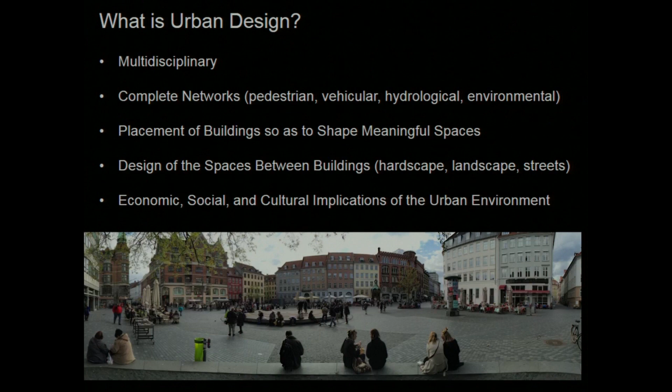Now, what's urban design? Urban design is a multidisciplinary field. It involves quite a few things, including transportation, land use, buildings, open spaces, landscape, hydrological and environmental factors, and first and foremost, the placement of buildings in a very intentional manner. There are also economic, social, and cultural implications that go along with that as well.

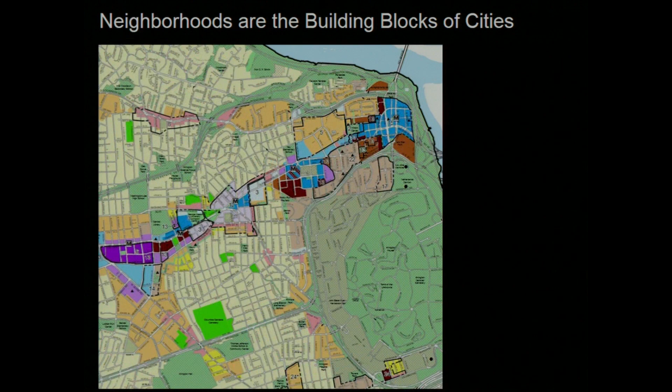All great cities are made up of neighborhoods. Paris famously has its neighborhoods, and Arlington also has its neighborhoods, which are reflected in our land use policies and general land use plan. There are certain fundamental things that neighborhoods have: an identifiable center and edge, often with the edge being some kind of larger arterial or natural feature. They have a range of housing types, places to eat and work, and open spaces and places to recreate. Ideally, every neighborhood has a little bit of everything—sometimes more residential, sometimes more commercial—but generally a neighborhood has a range of things in it.

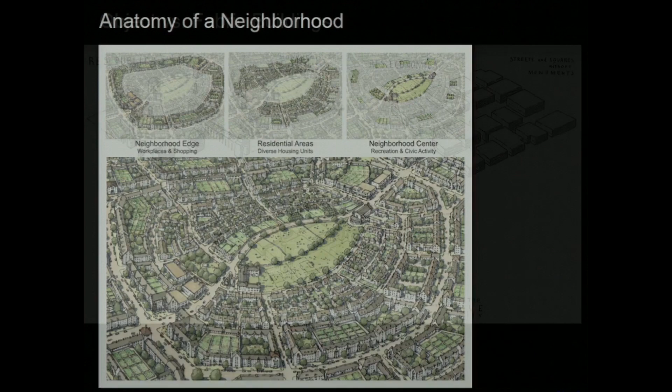Cities are also made up of the building blocks of buildings, but they're not necessarily all on equal footing. You can have a building that's all civic buildings, but you need the combination of civic buildings and public or private buildings together that, in concert, make up a city.

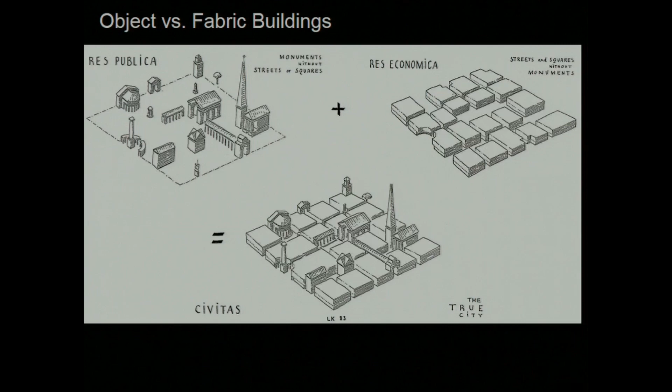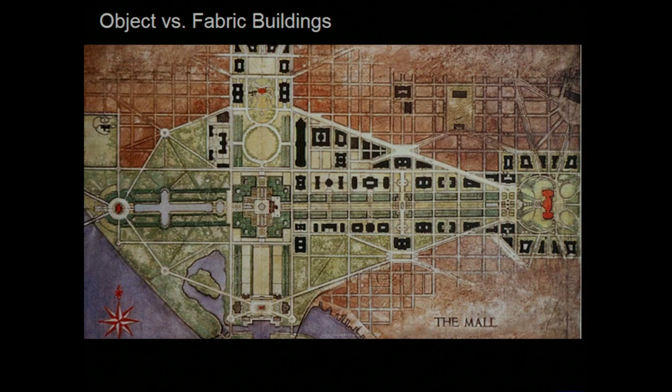Washington, D.C. is a really good example of that. From the McMillan Plan, you can see the buildings shaded in black are the civic buildings—those are the important buildings. The buildings in the blocks shaded more in pink are the private development, where people are living and working. Together they make up a city.

The same is true from the 1909 Burnham Plan for Chicago, which very clearly outlines that. You can see the blocks of private development, and then there's special attention and special placement of buildings that have civic and cultural importance.

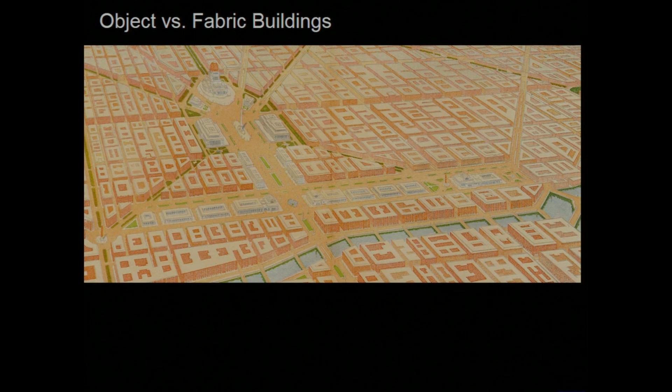So, I talked a little bit about the enclosure and the intentional making of space, and I think this is really the most fundamental aspect of urban design. The buildings are important, but the most important thing really is the space between the buildings—making a place that's comfortable and very clearly defined.

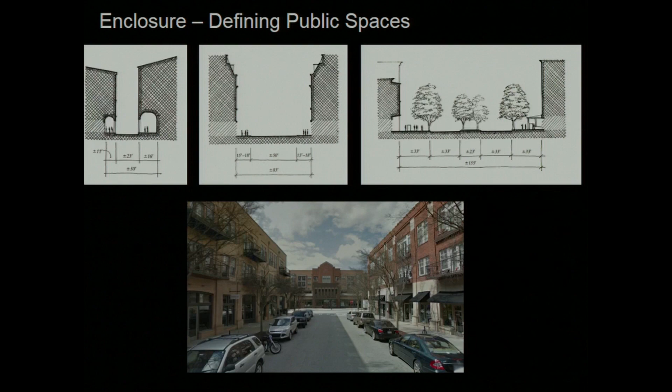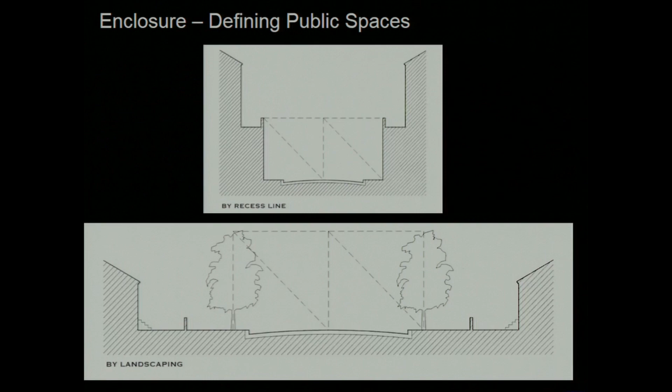These can range from the upper left-hand corner, a very narrow street from Europe, to the upper right, more of a typical American main street. But the thing that those very successful places all have in common is they generally have pretty tight proportions that the buildings, and sometimes the trees, create to make that space. A proportion of 1 to 2 or 1 to 1 is often very good. If you get any farther apart than that, you start to lose that sense of enclosure and that sense of space.

The design of the buildings themselves, while there are important factors that help reinforce those successful spaces—pedestrians are very comfortable in these more enclosed spaces—the design of the buildings themselves doesn't matter as much. You can have something more traditional or more modern, but as long as you've got that enclosure and the buildings are doing the right things, you're going to have a pretty successful environment where people want to be.

But it can also happen in a more subtle way. A street just curves ever so slightly, or there's a hill or some kind of natural feature that helps to create that sense of enclosure.

There's certain things for commercial buildings that are very important. You need to have transparency. As people are walking by on the sidewalk, they need to be able to see what's going on inside the buildings, a sense of activity. But also you need some kind of delineation between the pedestrian realm and the upper portions of the building. There's a lot of other things that go along with that, signs and canopies and street furniture, that all help to contribute to that.

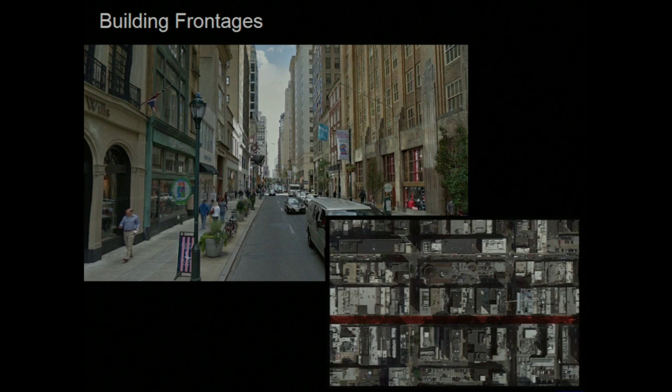One of the most fundamental, important things to having successful frontages for buildings is that they need to be continuous. So the photograph in the upper left-hand corner is from Walnut Street in Philadelphia. You can see a pretty successful retail street. There's a large assortment of buildings, all different designs. But the thing that makes that all possible, you can see on the bottom right-hand corner, there's a little aerial image. The red outline delineates where Walnut Street is.

The thing that helps support that is the network of alleys that actually run behind the streets that help to service those retail areas. So if you imagine the same street interrupted by frequent loading docks and parking entrances and things like that, you start to lose that synergy and that collective energy of all those shop fronts close together.

So the design of these spaces isn't something that happens overnight, and it doesn't happen by accident either. This is an image from Savannah from the early 1700s. If you've ever been to Savannah, one of the most famous things about it is the squares that it has.

They have a variety of characters to them. But you can see, I believe this is 1734, right as they're ripping the new settlement from the wilderness, that even though at the time it's basically a single family home subdivision, the homes are actually arranged in a way that's very urban. And you can see the squares are actually already there, already laid out and ready to be filled in and completed.

Rittenhouse Square from Philadelphia, the same idea, a very old plan. It's been filled in over the years. You can see the buildings around it are from different time periods, they have different styles. But one thing that is very apparent is when buildings aren't playing along with the others.

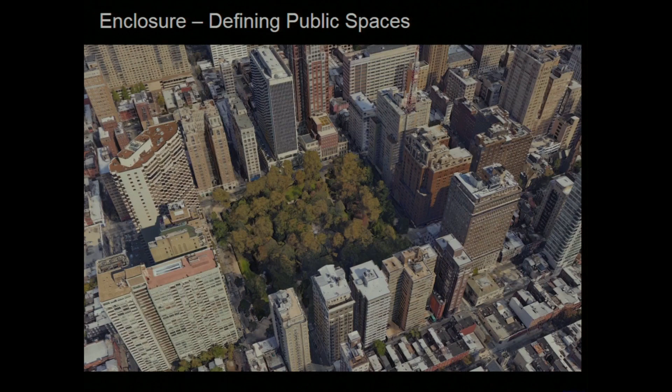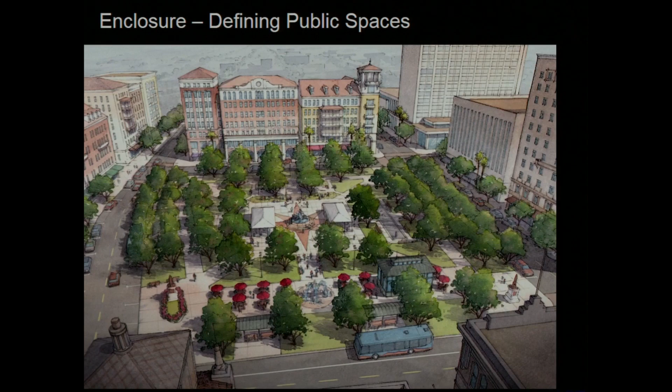All these are helping to reinforce that space. And this one, the architect just wanted to do his or her own thing. So again, the idea is that the buildings really all need to be working in concert to help shape those spaces. And in addition to those buildings shaping the spaces, it's also important to think about the design of the open spaces that those buildings are framing. And Brett is going to talk a little bit about that.

Thank you, Justin. So Justin's done a really great job of setting up the framework you can see here in this map of Paris. We talked about neighborhoods, we talked about blocks, we talked about streets, and we talked about the placement of buildings, creating enclosure, and now we're going to move on to talking about the design of the public spaces, the spaces between the buildings. And you can start to see in this map here, outlined in green, the network of these open spaces and how all this really starts to fit together to create a special place in a great city.

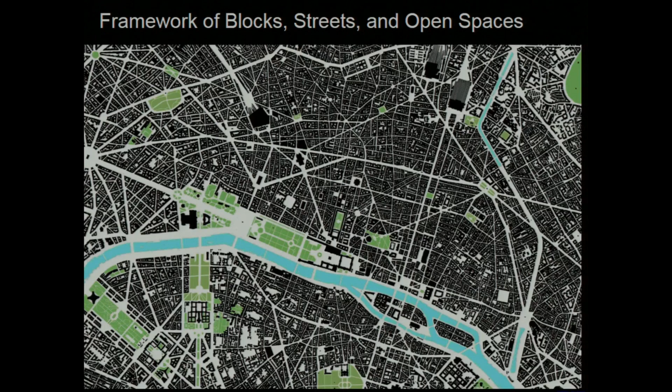Before we start getting into the design of the spaces, we always like to look at comparisons from other areas across the country or the world. This is just an example of some other public spaces with different acreage, and we start to identify what works and what doesn't, what fits in what space. We'll get into that detail in a minute.

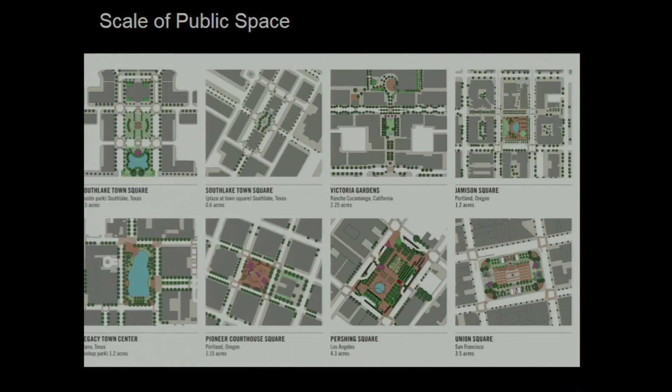Once we start diving down into a public space, we'd like to look at what the anatomy is to create that special place. This is a diagram and picture from Jamison Square Park in Portland, Oregon, and you start to see some of those principles applied here. We've got buildings framing the public space with windows facing onto the space, serving as visual surveillance, eyes on the space. We've got a balance of passive and active uses here.

We've got hardscape on the left with a very active water feature, and a more passive green lawn, flexible lawn space on the right, and there's a hierarchy of paths that move through the space. All this really works together to create a great space. This park, pictured here with the water feature in the middle, is approximately 1 acre in size.

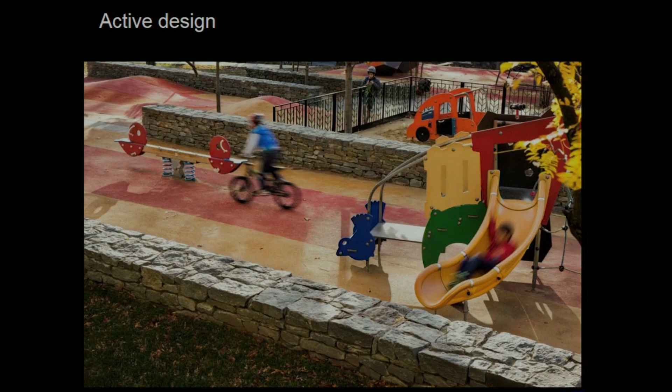Another thing we like to think about as designers when looking at plans is how we incorporate active design and recreation and healthy lifestyles into our public spaces. A lot of this involves heavy programming, but planning out spaces that are flexible and can accommodate these types of events is critical.

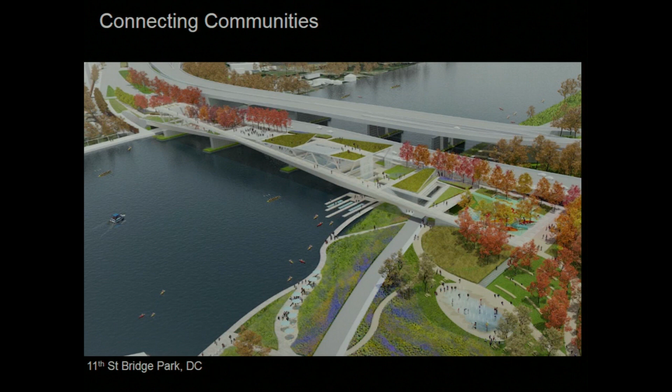And we have, in the future, our very own example here -- this is, or we will have in the future, the 11th Street Bridge Park in Washington, D.C. The Navy Yard is to the north, and this is Anacostia over here. This is an existing bridge today that will be repurposed to create a really great public space, again connecting those two neighborhoods in Washington, D.C. So thinking about repurposing infrastructure is something we need to consider when looking forward in our planning efforts.

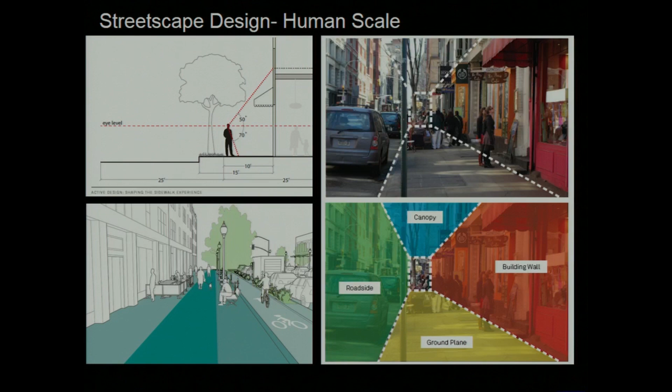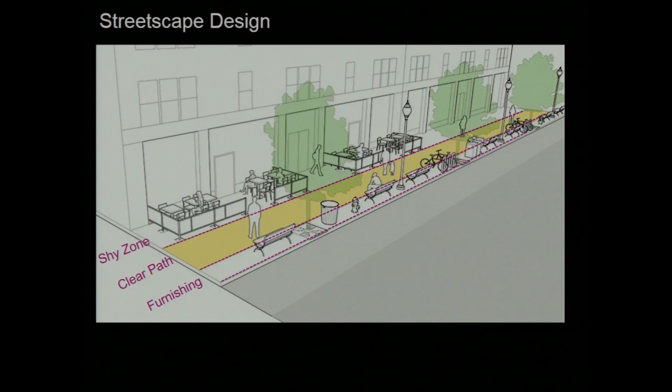And in terms of the streetscape design, we've identified, along with other cities, a building frontage, these zones for travel. There's a shy zone where cafe seating is usually located. There's a spill out zone for people coming out of retail and cafes. Usually there's a clear path outlined here in yellow, and then the furnishing zone along the curbside, where we see street lights, trash can, benches, and other furniture and utilities.

And in terms of streetscape furniture, depending on the district, we like to create a consistent, cohesive family of street furniture, again, so that everything relates to one another. It feels intentional and it's not piecemeal. And so this is just an example from the Rosslyn Business Improvement District streetscape, some of the furnishings they're considering. And there's a lot of design thinking about how all that is laid out on the street.

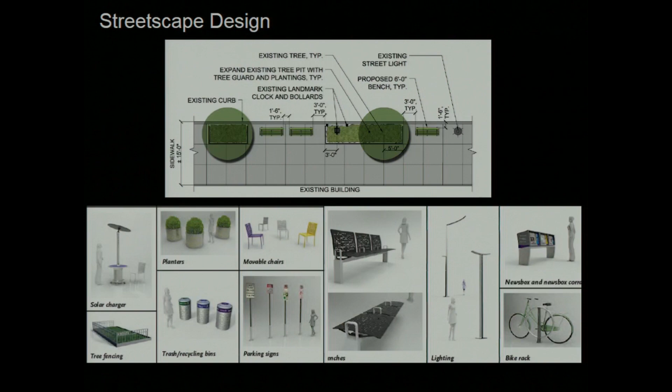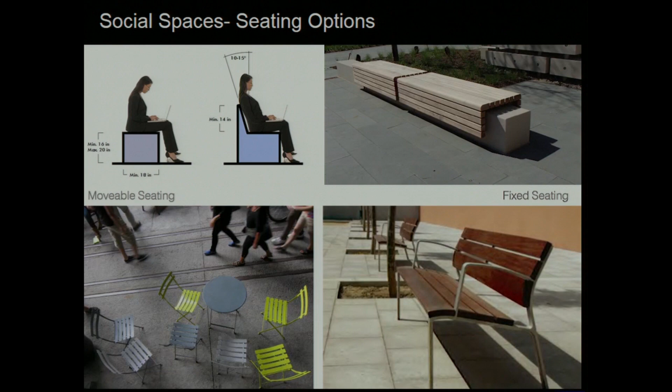And in terms of the furniture, there's a variety of different furniture. I believe the success of a really, truly great public space has a variety of different seating options. So you have fixed seating, you have movable furniture, there's seating without backs, there's seating with backs, and then when you start thinking about seating, we have to think about the ergonomics of seating and user comfort, and thinking about the different angles of the back and what's a comfortable sitting height, which usually ranges between 16 inches and 20 inches. So a lot of things to consider in the furniture layout and design.

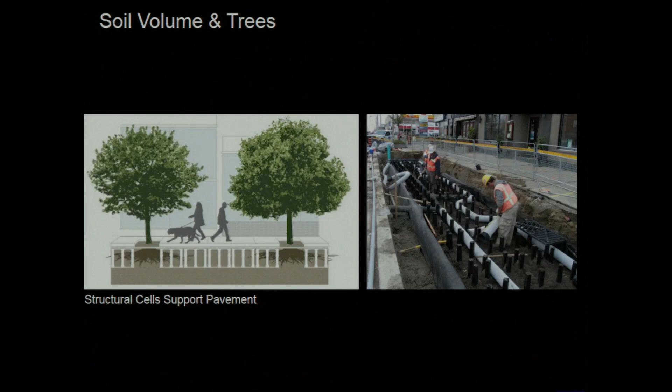These are things happening below the pavement that we look at throughout the design process. This is another example of structural cells that support pavement, and this is an example of this going into the ground. These are plastic crates that support the pavement above, both pedestrian and vehicular loads, but also allow for uncompacted soil below grade so that roots can spread out and eventually create healthy large trees.

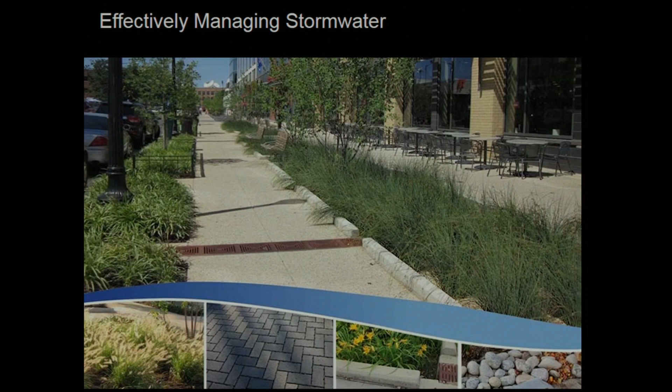Streetscapes are also a way to intercept stormwater. We've got a lot of stormwater regulations, and we're looking at how we can capture and treat stormwater runoff from the street and the sidewalk. This is an example from Washington, D.C. in the NOMA district, looking at native plantings, low-impact development. We've got cafe seating, clear paths identified here, pervious paving, and other materials on the sustainable palette for that project.

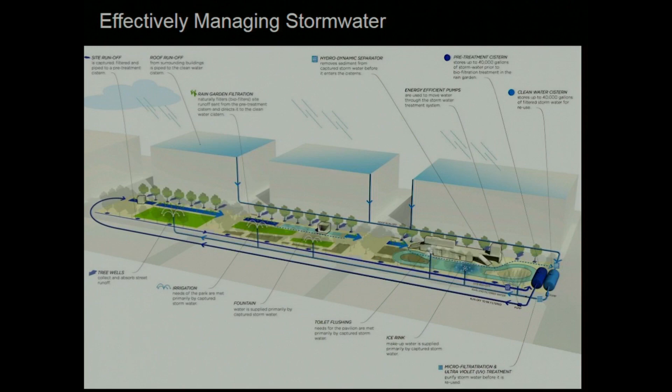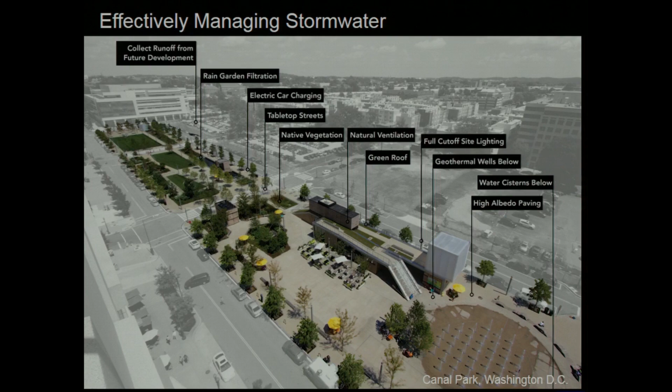During the wintertime, there's an ice skating ribbon here, and during the summertime that's removed and it becomes a water splash pad for children to play in. There's flexible lawn spaces—you can see in this aerial perspective that splash pad converted into an ice skating rink in winter. There's a cafe helping to activate this space on the corner of M Street, and flexible lawn and event space that can be programmed to support some of the events we showed earlier.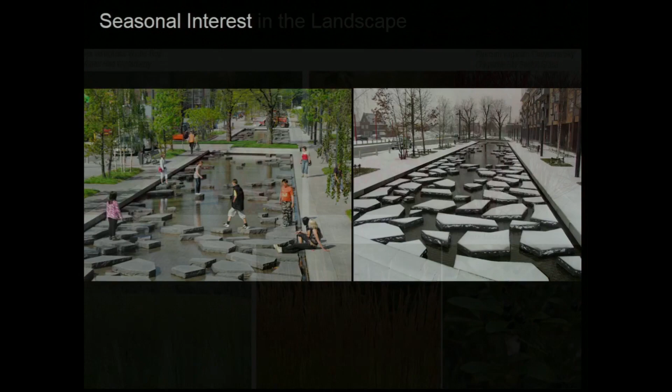Again, thinking about the different seasonal interest in the landscape, we've got a water feature here. How that's used in the summertime versus how it's perceived in the wintertime really creates a dramatic effect with the snow—things we need to consider in terms of seasonal interest in hardscape, but also in the landscape. We like to look at plants and species during our site plan review process, but even post-review we're looking at landscape plans to ensure we're selecting the right plant species that create the most dramatic effect.

This is an example from the Lurie Garden in Chicago near Millennium Park, but this is a really great design—a way that the landscape architect used salvia, which blooms in the early summer. It creates a dramatic effect with a purple wave running through the landscape. And so thinking about different seasons and plant species as we look at these landscape plans is what we do on a daily basis.

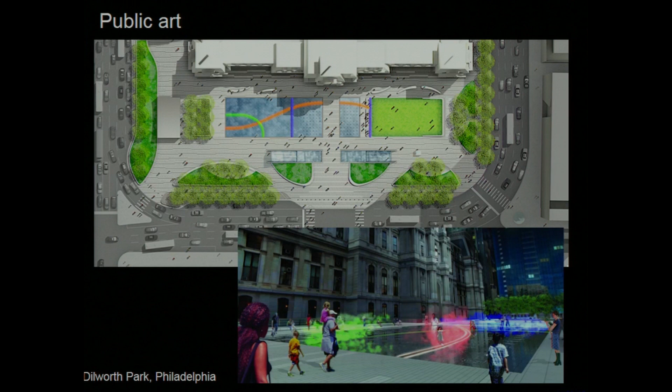This is a plan diagram of the plaza, and so the orange and the green represent the subway lines below the plaza. The designers worked with an artist to create an interactive lighting display so that when the trains pass underneath the plaza, it's reflected in light in the plaza at night. Just other creative ways to animate the ground plane and create interesting public spaces.

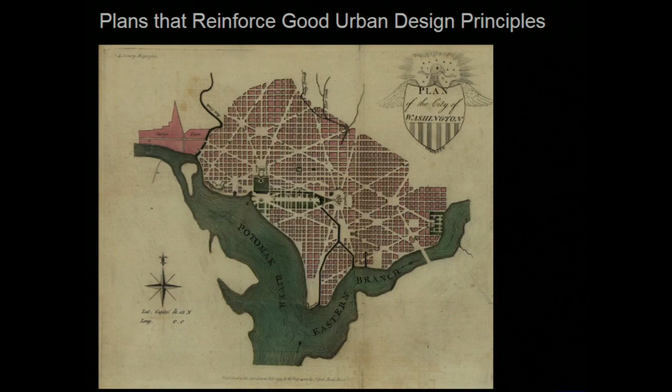Make no small plans. I think we as Americans have actually done a pretty good job of making very bold plans for cities and towns. In particular, for the cities and towns that we may never actually live to see come to fruition, but really for future generations. And in Arlington, we're really good at making plans too.

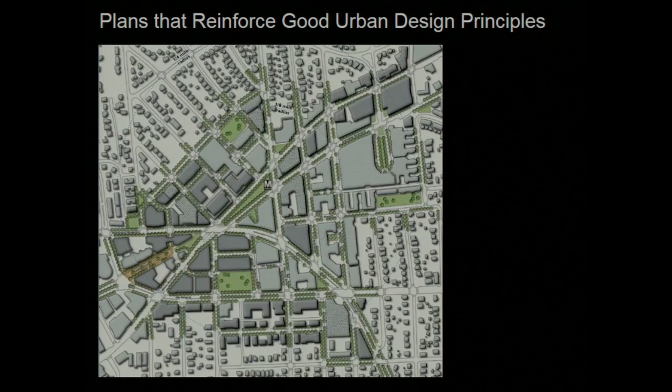We have all of our range of sector plans that we update quite often, and they all incorporate all these elements that Brett and I have talked about in terms of good urban design practices. They usually start with some kind of illustrative plan, a community vision about what we want to see happen over time. These plans envision new connections, new spaces that don't currently exist. And they also consider things like buildings and streetscapes and what the details of those should look like, how the buildings should relate to one another, creating open spaces, meaningful open spaces.

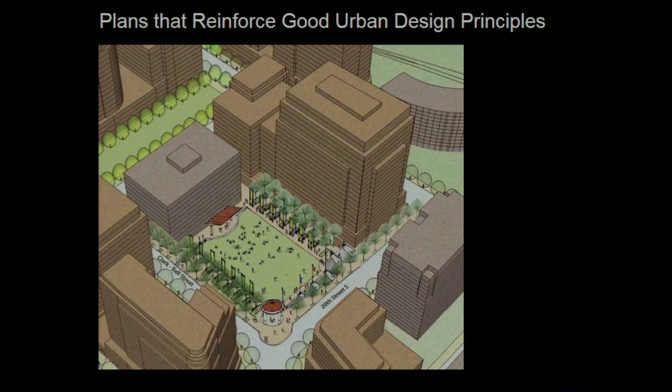But really, we can make lots of plans and we can have beautiful renderings, but the plans really can never come to full realization without the private development that sort of comes along and helps to fill that in. And Samia is going to talk a little bit about the importance of the private investment in our visions.

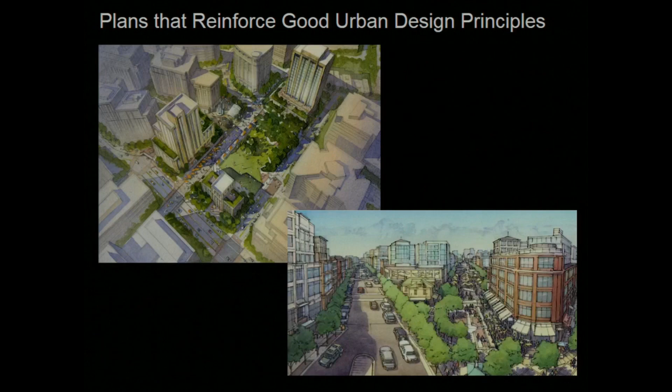So I think one of the really significant things about development in Arlington County, as set forth with all the presentation we've heard so far, is that we really do set out and have from the very beginning looked to develop our urban corridors—the Rosslyn-Ballston corridor, Jefferson-Davis corridor, and also now Columbia Pike—establishing sound plans that have been adopted that incorporate all of these design principles and really set forth and establish the vision that we intend to achieve in building out the county, in particular, again, those urban corridors.

And typically what we look to do is developers—that's the primary way that we achieve the vision of a lot of our sector plans throughout the corridors—is through these private development proposals that seek to develop on sites throughout the area. And really what we're looking for when we're reviewing those in our special exception process, which is a process that involves county staff as well as the community and others, is to look at fulfilling those plans and how they conform to them with the private development that they are putting forward. So there are a couple of phases of that.

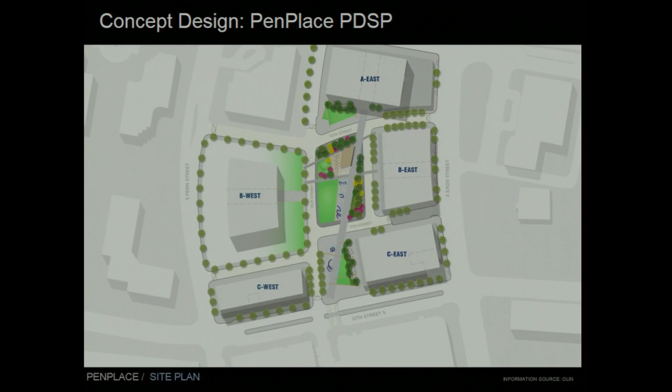Just to the north of that is the PenPlace PDSP project, which is unbuilt, currently vacant land, just north of Met Park. I wanted to walk through some of the diagrams and design and plan thinking we went through in the master planning and creation of that PDSP and design guidelines. As you can see in these diagrams, we started with looking at blocks and streets.

How can we break up that large tract of land and create a street network and developable footprints? We looked at open space and the public realm and how the PenPlace development connects with Met Park to the south. We looked at building placement and the framing of open spaces, reinforcing those connections, looking at 12th Street as a major transit and pedestrian corridor linking Crystal City to Pentagon City, and how it all comes together in this composite diagram to create a special place in Pentagon City.

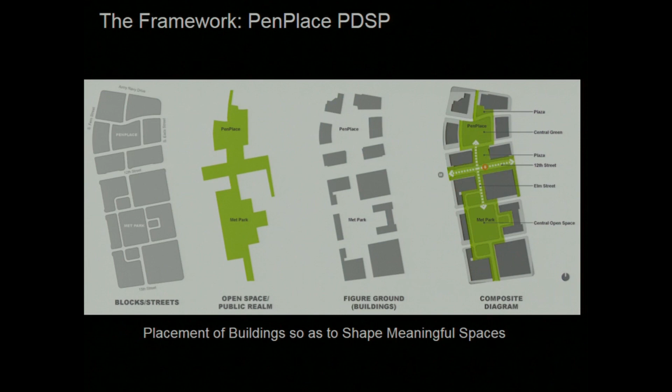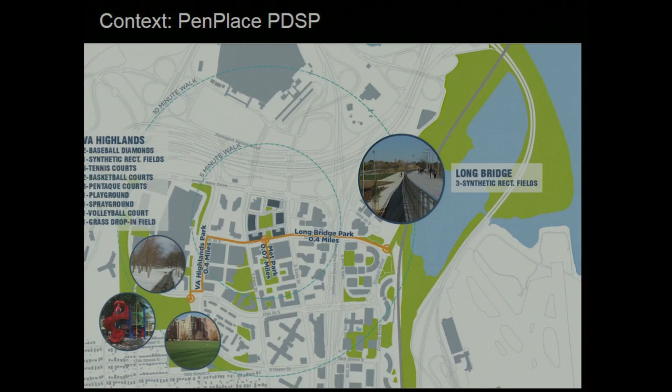So when we were looking at PenPlace and the open spaces, we always start by looking at the context—what's around there, what amenities are within those public spaces. We look at Long Bridge and Virginia Highlands, and Pentagon Row to the west, and look at what amenities are in those public spaces to help inform what we might want to see in the future here at PenPlace.

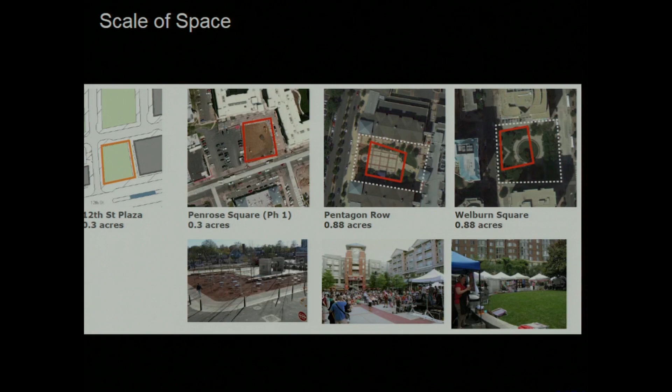For one open space, the 12th Street Plaza—Met Park is to the south—this is really the first impression, if you will, to PenPlace, envisioned as an active retail, more of a hardscape plaza. We started looking at other examples in Arlington County, like Penrose Square phase 1, which is complete and comparable in size to the 12th Street Plaza. Then we looked at Pentagon Row and Welburn Square in Ballston, studying what kind of programming and amenities are in these spaces to help inform what we might envision in the future.

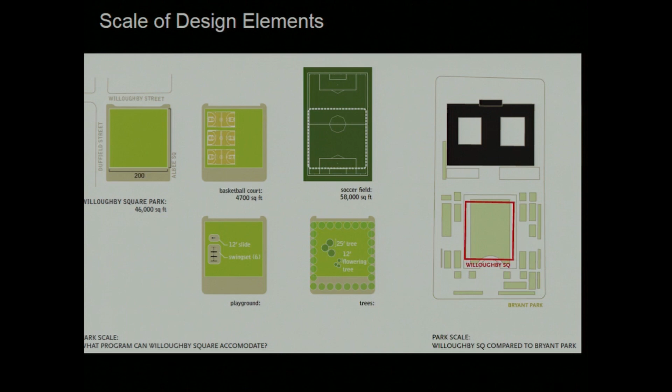And then within those spaces, once we determine the scale, we want to understand the scale of those amenities that we might want to see here. So whether or not we want to see basketball courts or other large playing fields or other play features, again, we have to come back to scale and looking at comparisons and understanding the size of certain things before we start on the drawing board.

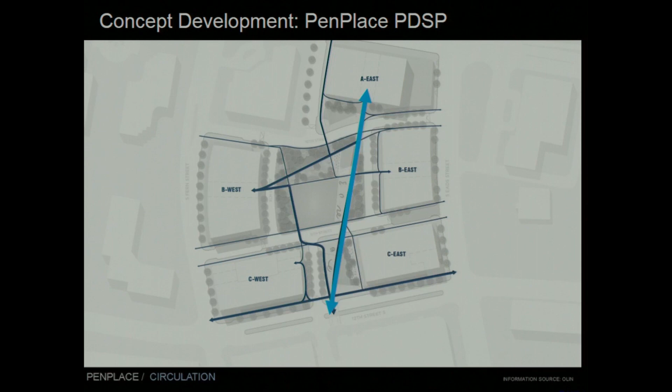This is just a diagram of PenPlace. This is 12th Street here to the south. A lot of the things that came up during the public discussion and community process was, how do we really get people into the interior of the park to the north? If all the activities are here on 12th Street, what can we do to really activate this part of the open space? So there's this strong axis that's really the organizing element of the park design.

You can start to see here in these diagrams, this would be 12th Street, and this is that strong axis. There's a cafe that really serves as a terminal vista, which Justin outlined earlier, but really a way to draw people into the site. And then how are things organized off of that central axis?

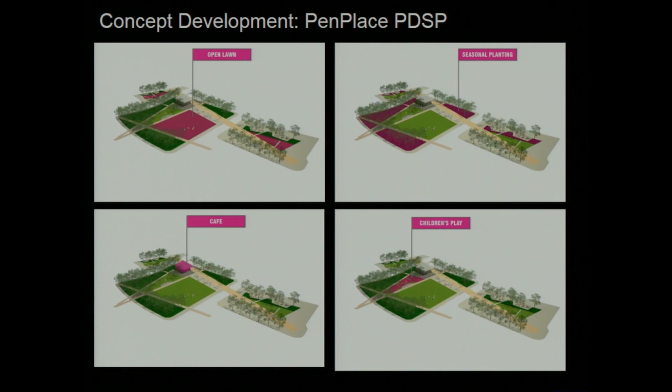We've got flexible lawn space to support programming and events. There's planting design. There's children's play that's situated right next to the cafe, so you can get a drink, a cup of coffee, or what have you, and watch your child play. There's, again, the cafe serving as that terminal vista.

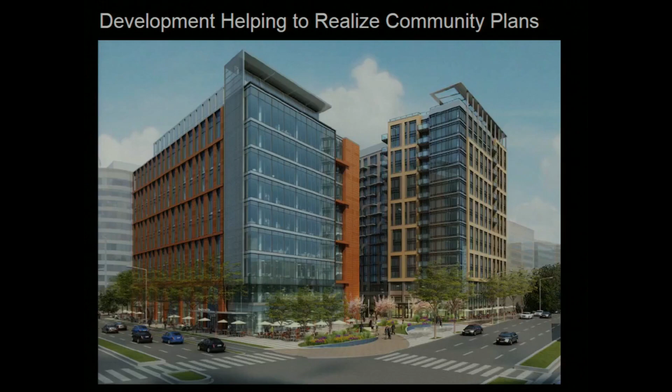Again, focusing on the open spaces here, there were some slight modifications to the architecture, but I really wanted to focus on the open space and how we got from this mostly barren hardscape plaza to a very active retail environment here with plantings and a lot of historical references, which you can see in this rendering, and I'll go into some of those details.

But just an example of what we do as staff when we get a project like this: initial reactions. We meet with the applicant, we meet with the chair of the SPRC, we put together staff comments, and sometimes we put together diagrams like this about how we respect circulation and respond to pedestrian flows through the project.

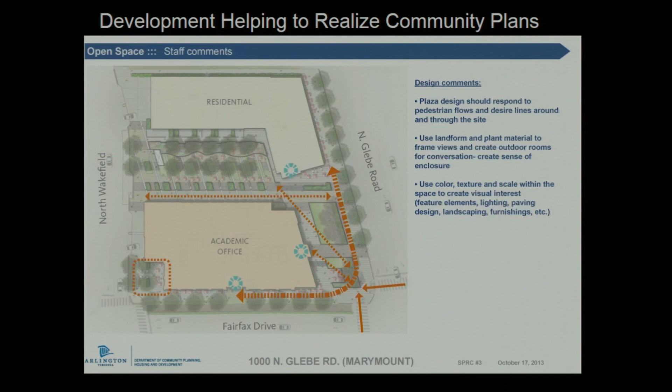How do we use landform and topography and landscaping to create a three-dimensional landscape and create some outdoor rooms and a sense of enclosure? How do we use color, texture, and scale within the space to create visual interest through paving, lighting, landscaping, and furniture? And so we look at precedent images all the time.

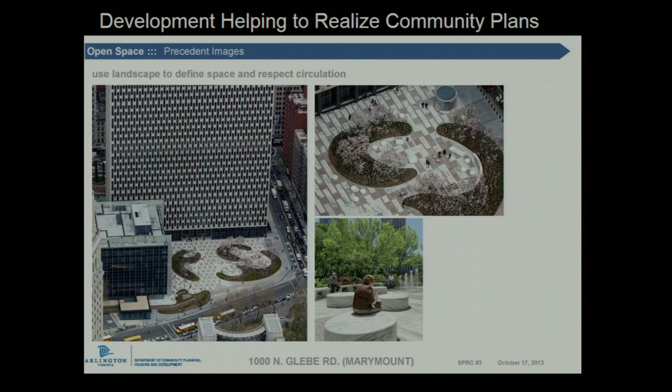I shared these images earlier, but it's funny because we actually use these same images to inspire the applicant in the design process to look at how we can use landscapes to help create spaces. We looked at how we can salvage and reuse some of the panels from the previous Blue Goose building that sat on the site, and how we can reuse that, if not in the architecture, in the landscape.

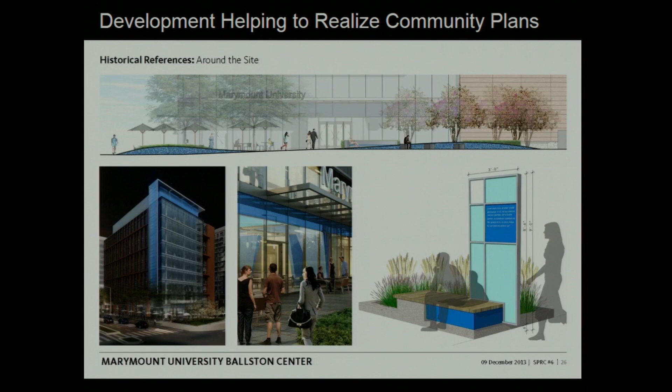So we work with the applicant and SPRC and HALRB and historic preservation staff to really get them to incorporate this blue element in the architecture, in what will be the future Blue Goose Cafe for Marymount, that fronts onto the plaza using blue architectural materials, and even into the landscape and the walls, again creating a three-dimensional landscape. There's blue tiles, and then creating historical markers using the blue panels. And again, this is all organized in the plaza.

So this is just an example. On the left is the plaza, what it looked like when we initially received it, and you can see the excessive amount of hardscape. The second iteration, revised concept, had a lot more green space, but as you could see in that previous diagram, it wasn't really respecting circulation through the space. And then this was the approved design that the county board ultimately approved. It's under construction today, and I believe it's almost complete, but it's coming to life.

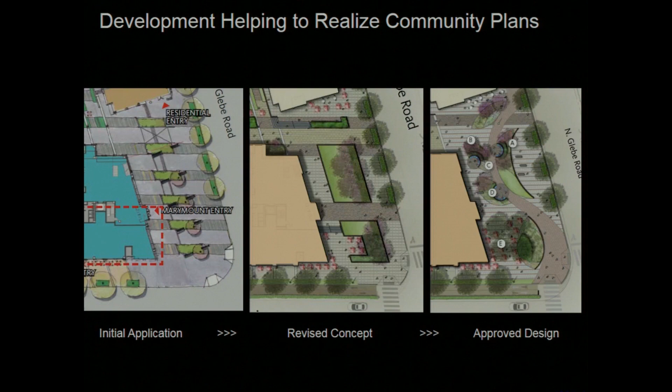And again, just another example of an area without a plan, using our own expertise in urban design to create a great place. We're looking forward to seeing that be completed.

Another example here is on Columbia Pike. This is the Village Center, the Food Star site, if you're not familiar. Penrose Square is to the east, and the Columbia Pike illustrative plan identified these spaces as town squares. Penrose Square, phase one of it, is complete. The Village Center site is here to the west, on the corner of George Mason and Columbia Pike. This is a close-up image of the illustrative plan showing what that future Village Square should look like at the time when the plan was developed.

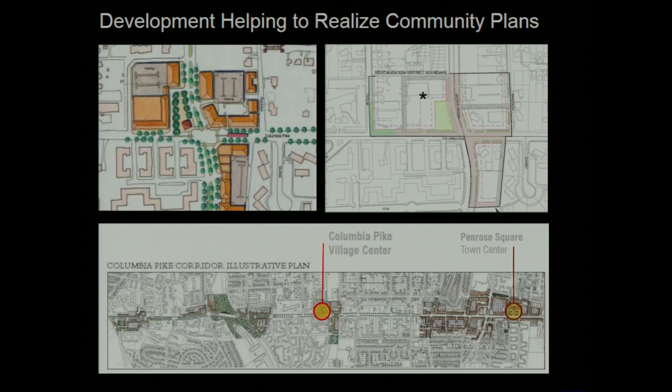This is an image from the regulating plan in the Columbia Pike form-based code. This is the building, and the future square is colored here in green. So we're taking these plans to this level.

We went through an extensive public review process with the community and the advisory working group of the form-based code. This is Columbia Pike on the left, South George Mason Drive. This is really in contrast to Penrose Square. Penrose is very hardscape, with a lot of paving and water features. This was really envisioned as more of a green oasis on Columbia Pike.

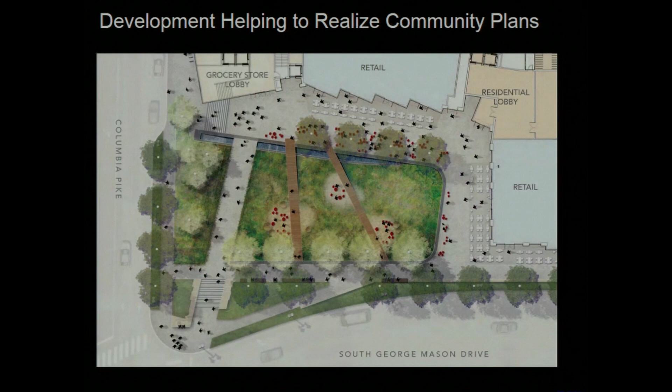So a lot of the green you see here, rather than being lawn space, is really native plantings, like meadow-style planting, landscape design, more naturalistic, with some flexible spaces for gathering. There's a main entrance at the corner. There were some topography issues that were very challenging that we worked through to create an accessible entrance at the corner. There's retail fronting it with cafes and seating, active edges and spaces to really get out and experience the landscape, and there's also some public art planned for this space.

Just going to wrap it up here, Justin.

Thank you. The Realize Rosslyn plan envisioned a new 18th Street corridor running basically as the spine through Rosslyn, meant to be mostly a pedestrian street. One of the first projects, in addition to Central Place, that came in to help start realizing that vision for a new 18th Street corridor was 1401 Wilson Boulevard.

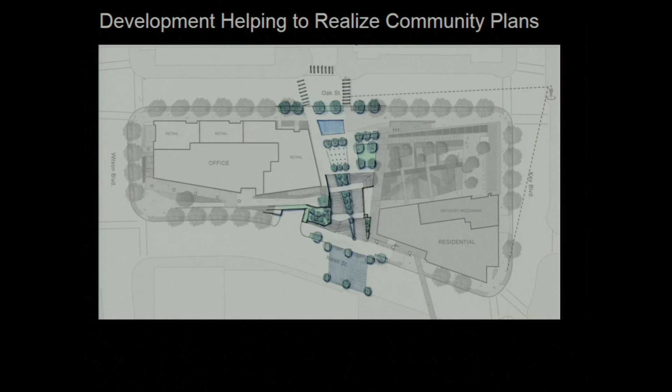So the ultimately approved plan was a little bit closer to this. Not quite what we had looked at, but again, it does a better job of opening that up and further reinforcing the idea of 18th Street as this pedestrian spine running through Rosslyn.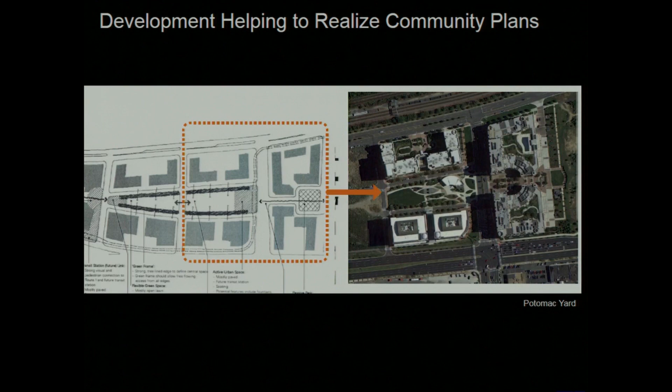In fact, we've got additional buildings coming in soon for the next two land bays there. So not only will the building development start to fill in more, but the open space will become a little more complete over time as well.

This is an example from Penrose Square on Columbia Pike. I think it's important to note that just because we generally know the best planning practices and look at other examples, we can never really stop studying our own built results to see what we can learn and how to improve over time.

So this was a study done by staff of Penrose Square, examining the different elements of the space—how people use it at different times of day, where people are sitting, what activities they're doing, and how good or bad weather affects use of the space. We always like to go back and look at completed projects to figure out what we can do better as we move forward.

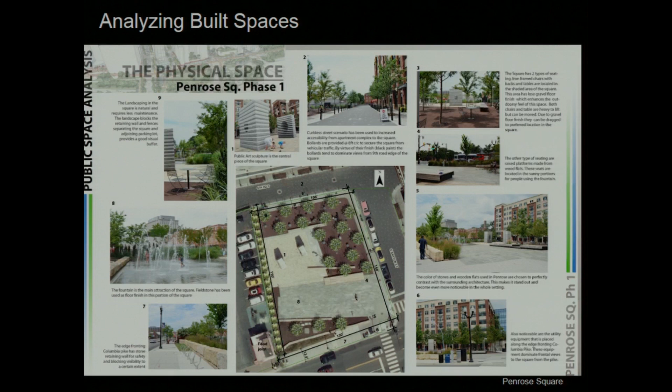So with that, I think we'll open it up for discussion and questions. I'd like to start with our planning commissioners—are there questions or comments about what you saw today that you'd like to ask our staff?

Thank you for the presentation, it's very engaging and helpful. Is this on? It's on. So when you began, you gave us the widest context you could to explain the fundamentals, and then you drilled down—I appreciated that. I think what you see as staff, when a project or application comes in, you do start with that kind of context.

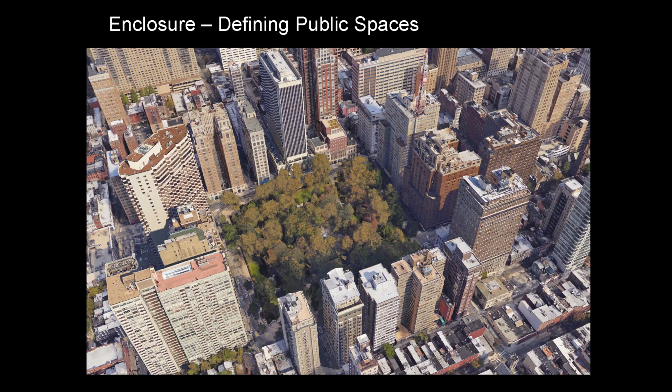But by the time we get to SPRC, that's not always quite clear. I think it would be helpful if staff presentations of a project gave a summary of that prior thinking, and even the discussions you had with developers. The Rittenhouse Square example stands out—the building catty-corner to the square stood out as an oddity, maybe, maybe not, I'm sure there could be arguments on both sides. It would be helpful for the community to understand that prior discussion.

Well, let me thank you, Commissioner, for the comment. Let me lead off—I think staff provided some great examples from the last 5 to 10 years where we've really started to embrace and employ these principles that both Brett and Justin laid out tonight. The case studies they discussed show the evolution of staff's thinking, which was evolving at the same time we were going through the site plan review committee process, hearing from community members, planning commission members, and other boards and commissions. Many of the images staff presented tonight weren't developed at the preliminary submission, or even before the submission was accepted and we began the site plan review committee efforts.

So as we work with the Planning Commission, the Site Plan Review Committee, the applicant, and the community—and it's important to note, as you started to touch on—it has been a partnership in Arlington County between all those parties to realize some of these great plans and public spaces that are now coming to fruition.

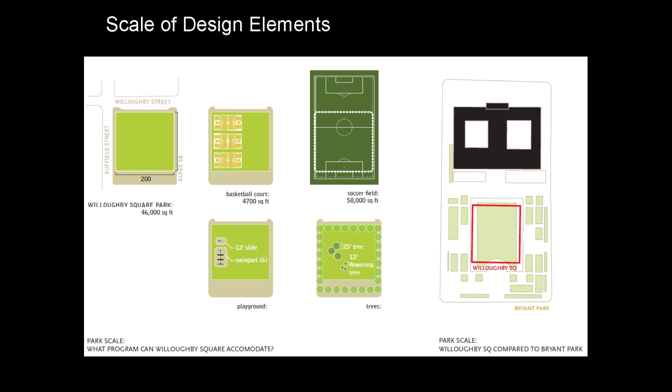Sure. In fact, our Department of Parks and Recreation has a cheat sheet, but it's mostly focused on recreational courts and playing fields—bocce courts, baseball diamonds, things of that nature—not a lot of the amenities you typically see in urban environments. There are some in there, but a lot of it really involves going out in the field, visiting these places with a tape measure, or when traveling, taking note or photographs and referring back to those. We always think about Bryant Park in New York.

I feel like everybody uses it as an example when they show us a public space, but there are so many different activities within that park—some pop-up, some permanent. Yes, there are some dimensions out there on the internet you can get to. We don't have a cheat sheet for all of those, but our Parks and Recreation Department has some more recreational style dimensions that we could share with you.

And I'd like to follow up with Justin a little bit about one of the first slides you showed, which was about enclosure.

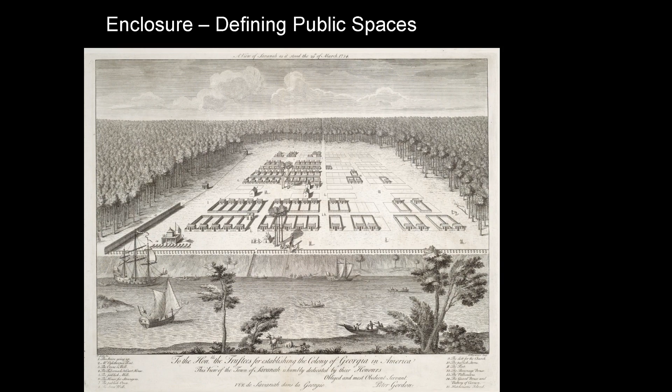Why is that so important? And what are some examples where the failure to create that sense of enclosure is really a challenge to creating that sense of place?

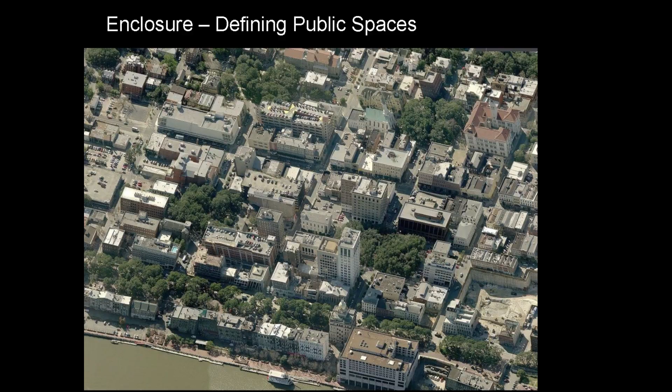Again, I think it's about being social. If you have a series of buildings enclosing a space within fairly close proximity, there are eyes on that space and it feels like an engaging space, as opposed to being in a very wide street or a big open parking lot where you can't see the faces of other buildings.

Some people make the analogy that buildings are like people. Is it comfortable to stand in the middle of a room where everyone is way in the distance, looking at you from far away? Or would you rather be within close proximity to other people where you can actually see their face and have a conversation with them? I think that's at the heart of that sense of enclosure. It's really about being social.

So I'm Jim Harris. I attend a lot of county board meetings, planning commission meetings, and even ZOCO and other meetings. I'm a resident of Arlington, where I've lived for 25 years, and before that, the Ballston corridor, which is undergoing massive redevelopment near Glebe Road.

I completely oppose any more new urbanism, which I and others believe is development for the sake of development, infill for the sake of infill, growth for the sake of growth, trying to pack as many people, activities, events, and vehicles into as little space as possible.

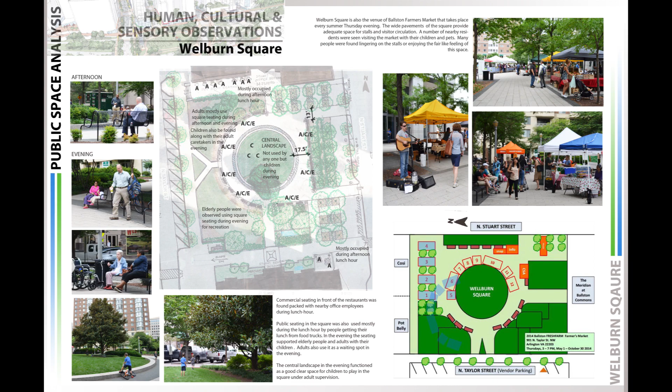That's post-occupancy evaluation, that's the technical term. And I think it's really important because as we look at these new site plans, we look at the lessons learned. Where are men sitting? Where are women sitting? At different times of year, you start to observe human behavior, because these public spaces are really for the benefit of the people. It's building a place for people to gather, to rest. If you look at Courthouse today, people just go back and forth through the parking lot—there's no conversations, there's no pausing. So we're really looking at trying to create those kinds of places where people collide and have interaction, and that's the foundation of community. That's why we look at these spaces and try to learn lessons from them, and I think it's been successful.

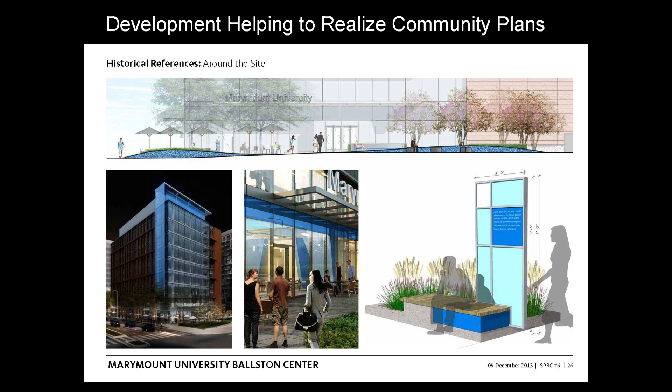Thank you, it's very interesting overall. I was particularly interested in the evolution of the open space at the Blue Goose, one of my favorite buildings, no longer there, but I like the memorialization of it. And part of that is because it seems to me that virtually all of the spaces we deal with as open space are privately owned. That's particularly painful for those of us who live in Crystal City, where the county owns two median strips, one of which is going to go away soon, and that's it. So everything—we are at the mercy of developers, and that's not necessarily a bad thing, but it does mean that anywhere there's a plan that calls for open space and is conceptual, that's not good enough.

Developers who come in with open space that may adhere to the letter of the concept plan, but completely lack creativity or any of the elements of urban design—open space enclosure, outdoor room, eyes on the street concept—is lacking. So I think more than some of the basic concepts coming in, it's really important that a staff report address that up front, maybe just a few bullet points of basic guidelines, so that those of us looking at a development submission can say, okay, technically it has the square footage required or suggested by a plan and in the right location, but in no other way does it really fulfill some of the concepts we'd like to see. And since it's not county-owned and county-controlled, it's even more important that these guidelines be adhered to, particularly because there has never been a development, in 35 years of looking, that has ever come through as-is without some sort of concession required.

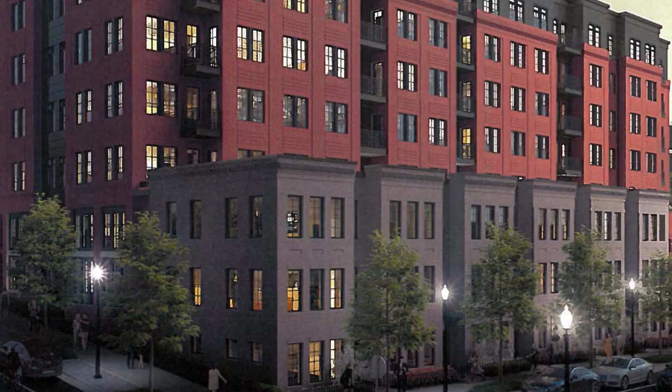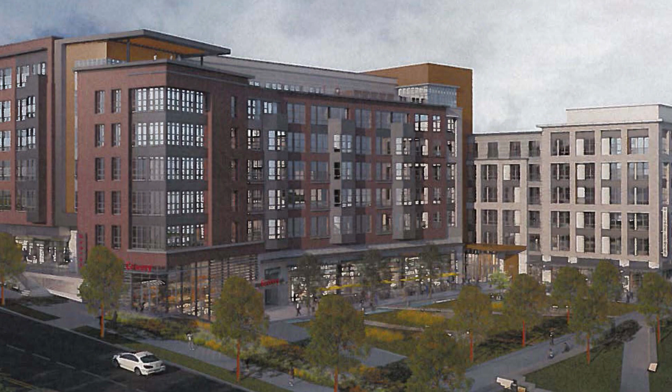Justin, I have a follow-up question. You were working in the private sector and helped us develop the Columbia Pike Corridor and the form-based code. And more recently you just did a session a couple weeks ago looking at the buildings. What trends are you seeing in the architectural profession today that might lead us to reinforcing some of these urban design fundamentals that we're striving for?

Well, I think in general I feel like design professionals are being more cognizant of buildings that are engaging with the street. I think that by nature buildings are much less suburban than they used to be. Like I'd mentioned, frequent doors and windows and things like that are now part of, I think, the common vocabulary of architects and designers as they're coming up with concepts for sites, whereas in the past that wasn't necessarily the case.

I think previously sometimes the overall design concept, the building as a sculpture, sometimes often trumped the responsibility of the building to be a good neighbor. So in that sense, whether you like the designs or not, specifically the materials and things like that, I think generally the trend is that the buildings are being more social.

Great point. Question back here.

Thank you. Bob, I appreciate you talking about time. Some of us in this room have been around in this business long enough to recognize the importance of time. I'm not sure how good the county's doing with it, though.

It seems, I've noted on many occasions, we're tearing down things that were built maybe close to that 25-year limit. That's considered antique for cars, but not for historic purposes here. We've had some losses, and I'm not talking about buildings, I'm talking about things that just went away. Why are we losing a bridge in Ballston? Why did we lose one in Crystal City? Both were iconic and good, strong references.

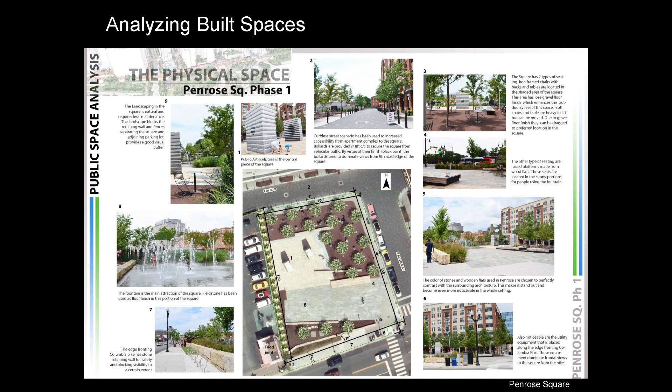Thank you. I very much appreciated the slides, Justin and Brett, that you were showing concerning some things that were built, for instance the study about Penrose Square. I'm wondering, for you two and for Samia as well, thinking about some of our conditions, if you all sometimes take time to go out and walk around in Arlington and take snapshots of what's worked and what hasn't worked, which I think helps us as planning commissioners and commissioners of other commissions - I hate using that word three times - and our residents.

When we come around the SPRC table and see an applicant come in, and for instance they want to put residential units right on the street, and we know how that doesn't work in Clarendon, but we think it might work at Red Top with different designs - I look to you guys to tell us, either at that table or offline with the developer, look, this worked, this didn't, drop that. So I'm wondering, I don't want you to give up any secrets, but do you have your little cache of do's and don'ts and things you're thinking about the next time you see a proposal, what you would recommend?

Justin, do you want to start? Sure. For me, after a site plan gets built, I go out and inspect the facades to be sure that everything is built according to the way it was approved by the county board. When I do that, I'm not only checking the built results against what was approved, but I'm also looking at all the details, seeing how new materials that architects and designers are using actually look in practice, and how all the pieces go together. I keep a mental note of what didn't really work out so well in a building.